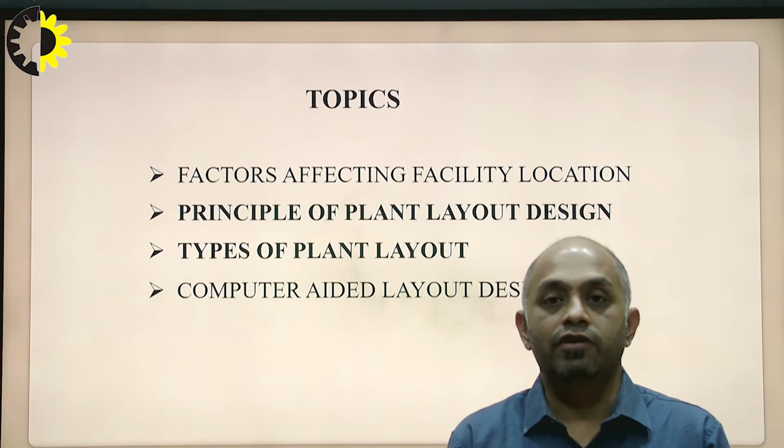So the principles of plant layout design: the facility layout problem is a multi-criteria problem. Numerous factors such as location of work centers, offices, computer center, design and drawing sections, tool room, storage space, utilities, etc., are to be considered.

The principles of good facility layout involve four things that we must take care of when we talk about a plant layout design. It is definitely a multi-criteria problem where we have to see to it that the other aspects and the machine locations, the way we place the machines, the way we produce the products are looked into, for a smooth production system. This relates to the production system that we have read in the previous lectures. These are 4 principles that we will talk about in detail in the coming slides.

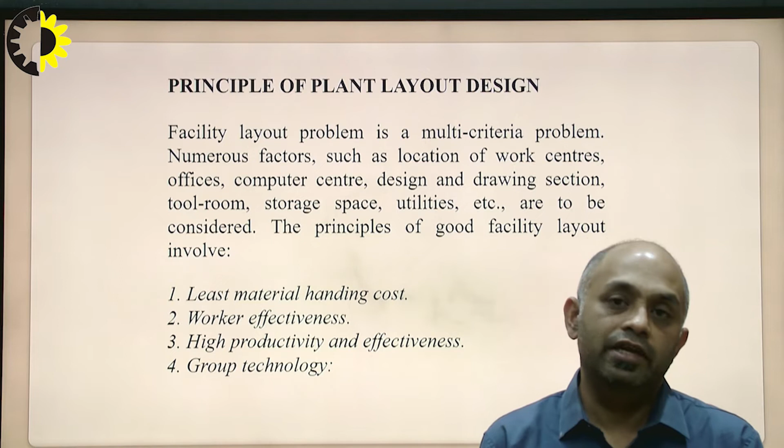The first one is least material handling cost. Second one is worker effectiveness. Third one is high productivity and effectiveness. And fourth one is group technology. So we'll see how these principles are used whenever I want to design a plant layout. These are basic principles that we have to take care of, and we implement them in the design process.

So the first is the principle of least material handling. For less material handling, the following approaches are adopted. Place facilities as per the sequence of part operation. Then proper location of store and packaging area. Then smooth and continuous flow of material. Then utilization of vertical space, height in material transport. So these are the points that we have to see whenever I design a material handling system.

In the process, I have to make sure that the layout is designed in such a way that the material handling is as less as possible. Material handling involves lots of time and also cost. So if the material handling is lesser, then the time is saved and the money is also saved. So place the facilities as per the sequence of the part operation.

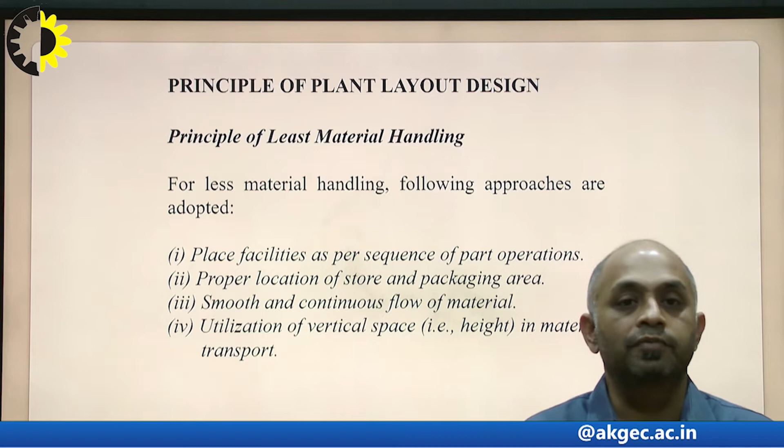Proper location of store and packaging area, smooth and continuous flow of the materials is very important, and then utilization of vertical space and transport. So this is something that we have to see when I talk about any plant layout design, right?

The second thing that comes is the principle of worker effectiveness. Effectiveness is nothing but the performance factor that works out here, how effectively we are doing this job. We have read about effectiveness in the previous video lectures, so now we can relate that effectiveness here in the plant layout design. For better worker effectiveness, the following approaches are adopted.

If I really see the concept that we actually talk about here, just wait, I'll just open the pen and we'll see how things actually work out here. The integration of similar facilities at the same location, right?

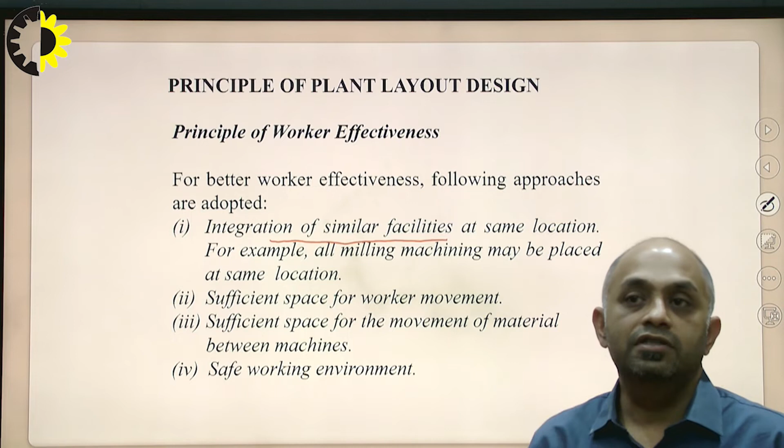So if I really see, worker effectiveness can only come up with the few changes that are required. I know that effectiveness can be imbibed with motivation also, but from the system parameters, I see integration of similar facilities at the same location, like all milling machines may be placed at the same location. So the operators of milling machines are staying together, and their work will give a better output when you place them together.

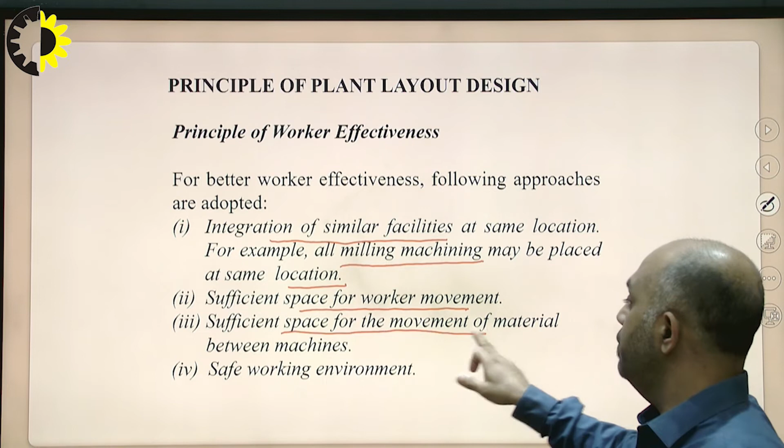Sufficient space for workers for movement, sufficient space for the movement of material between machines, and a safe working environment. These are the basic points when I talk about worker effectiveness. Workers are to be effectively used in the system so that their performance is high.

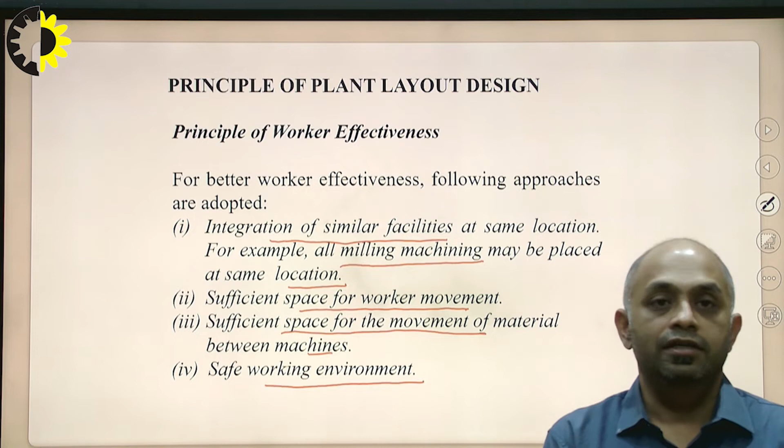One thing very important in plant layout is that there is a fear of obsolescence. If we do a layout in such a way that tomorrow, if the product changes, we cannot make changes in the layout. So we have to see to it that flexibility to expand is very important, flexibility of rerouting is important, and flexibility of varied product mix is also very important.

If tomorrow the product variety changes, we can easily accommodate that into our plant layout. If the routing is not rightly happening, we have to see that it can be rerouted if required. And there must be flexibility to expand the plant if required. All the options are to be kept in mind when designing a plant layout.

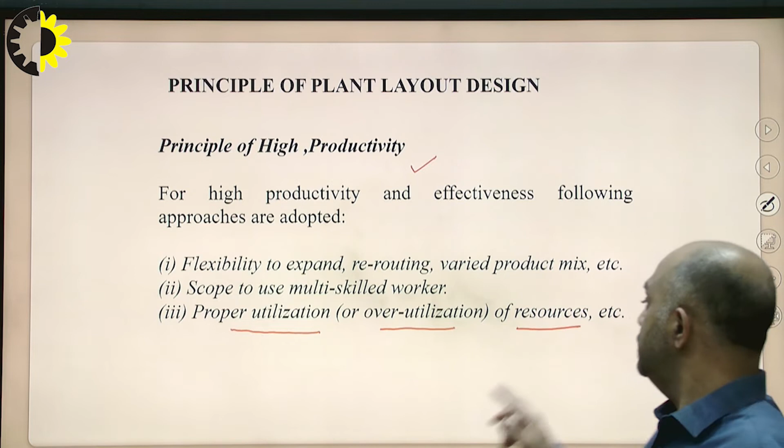Now, the second point in the principle of high productivity is scope to use multi-skilled workers. And the last one is the proper utilization or over-utilization of the resources, etc. So we can use the facilities and resources that we have rightly, so that productivity is achieved.

This is the last principle of plant layout design, the principle of group technology. For deriving group technology benefits, the following approaches are adopted. First, group similar parts in one family. For each part family, design a machine cell. A machine cell is a combination of machines which caters to all the processing requirements of the corresponding part family as far as possible, and minimize the inter-cell transfer of parts.

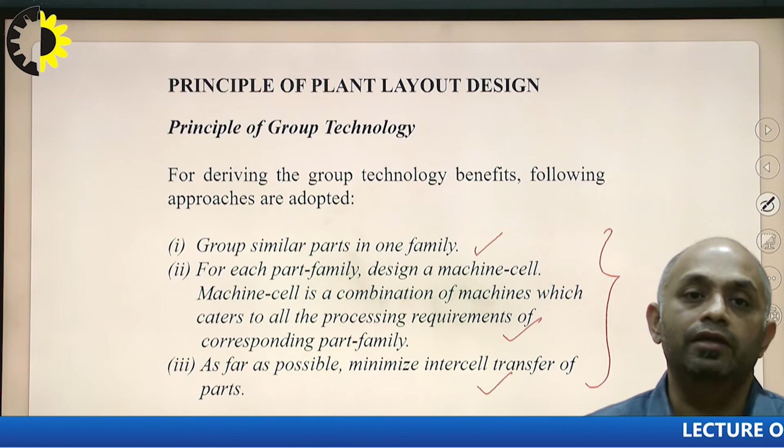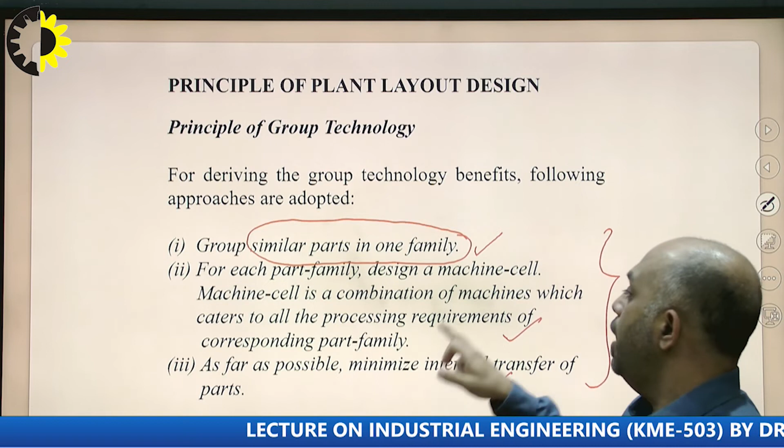So this concept talks about grouping the machines rightly, so that there is minimum time between movements and material transfer movement is as minimum as possible. This is basically grouping similar parts in one family. In group technology, we divide or separate the parts from one another depending on the part family.

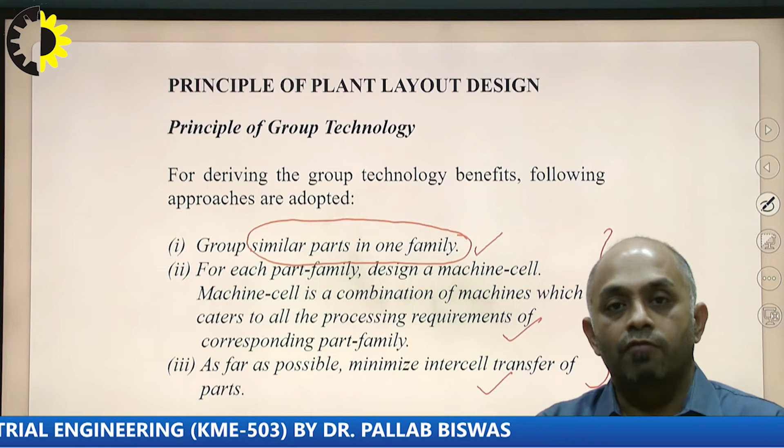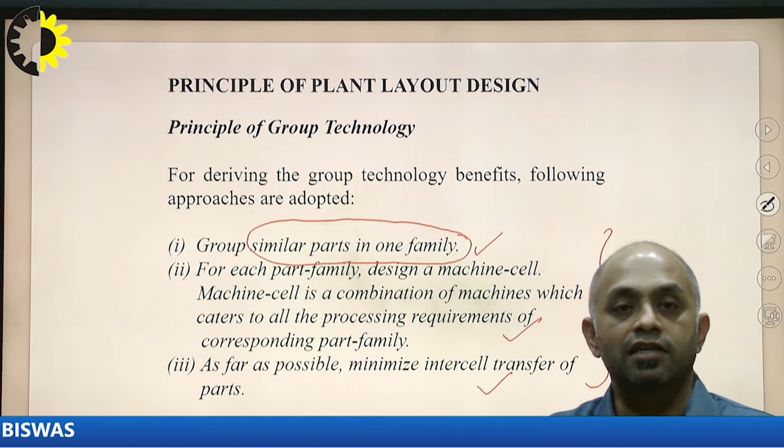If I talk about a cylindrical part, the operations done on that part are mostly on the lathe machine. So we can make a family of parts having a cylindrical shape, where a turning operation is required and the job rotates. This is a family you can make, and we have different codes for that.

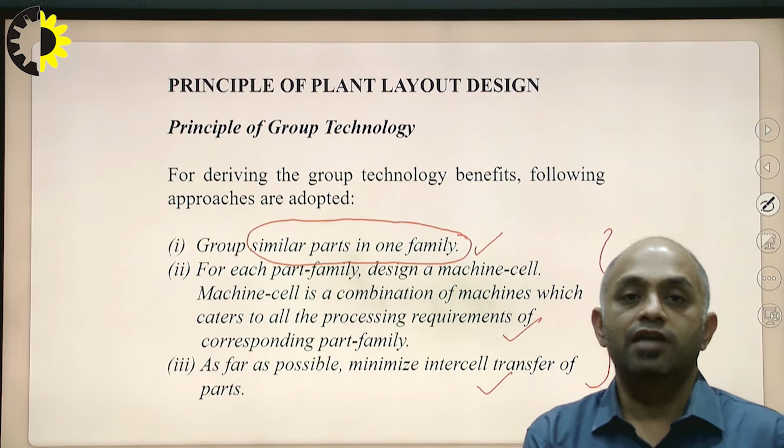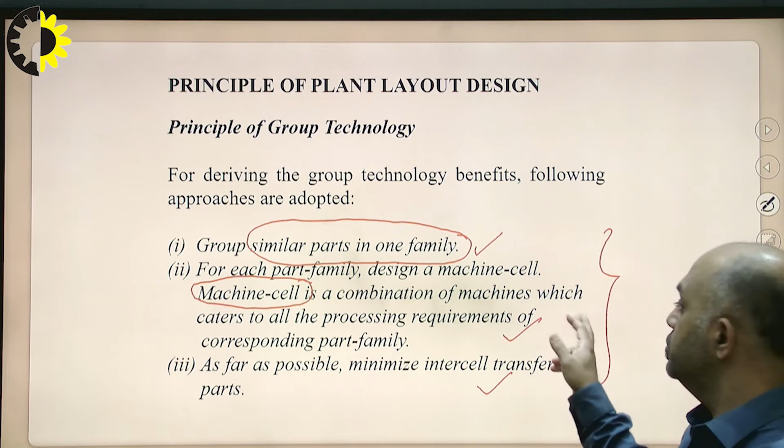Group technology helps us understand that the types of machines are to be kept in the same place, and that is why we make a machine cell, where we place a product and manufacture it from that machine cell. It's a combination of machines which caters to all the processing requirements of the corresponding part family.

As far as possible, minimize the inter-cell transfer. We must minimize this rightly so that the time in between transfers is not wasted. When you talk about group technology, there is a concept of line balancing. We'll talk about this in the coming videos.

When I talk about line balancing, I basically talk about making a number of operations into a cell, and then these cells are planned with the precedence diagram, and a whole lot of concepts come in when I talk about line balancing. And then I make sure there is no balance delay.

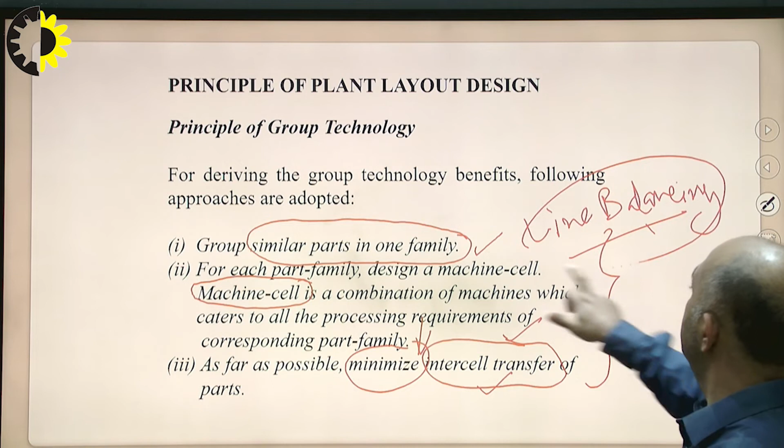The efficiency is higher, the smoothness is higher. So, these are the concepts that we will talk about in line balancing whenever we come to this lecture. In the coming videos, we will see how we can plan a line balancing problem. So, like this we can use this group technology concept.

Now, we come to layouts, the types of layouts. So, today we will be talking about product or line layout, and there are actually 4 types of layouts that we will be discussing in this lecture series. So, first today we will only talk about the first one, which is product or line layout.

So, we have got commonly 4 types of plant layouts, and these are all connected with the production systems. When I talked about production systems, you must remember that we talked about different types of production systems, and those production systems are basically accommodated in the plant layout. So, the type of production system is required, and then the plant layout is defined according to that.

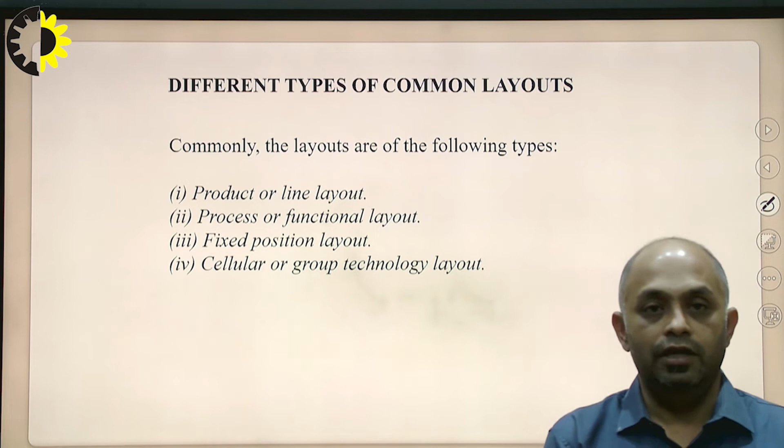So, we have got 4 types of plant layouts. These are product or line layout, the second is process or functional layout, the third one is fixed position layout, and the fourth one is cellular or group technology layout. So, this group technology plays a very important role. So, I advise you to also go through some literature on group technology, so that we can see that very rightly. So, product or line layout.

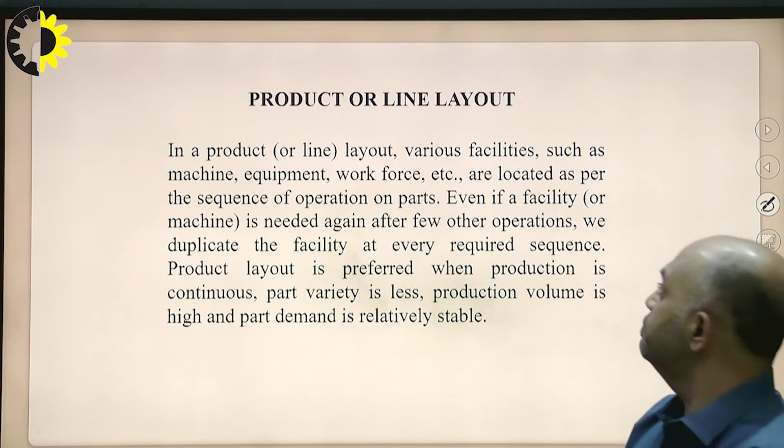In a product or line layout, various facilities such as machines, equipment, workforce, etc. are located as per the sequence of the operation of the parts. Even if a facility or a machine is needed again after a few other operations, we duplicate the facility at every required sequence.

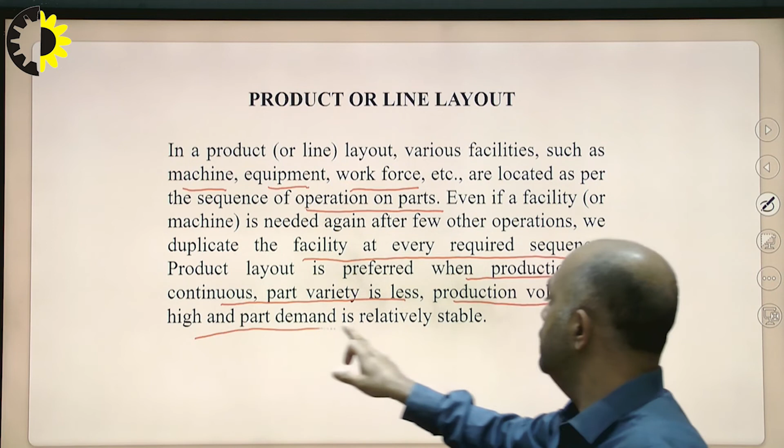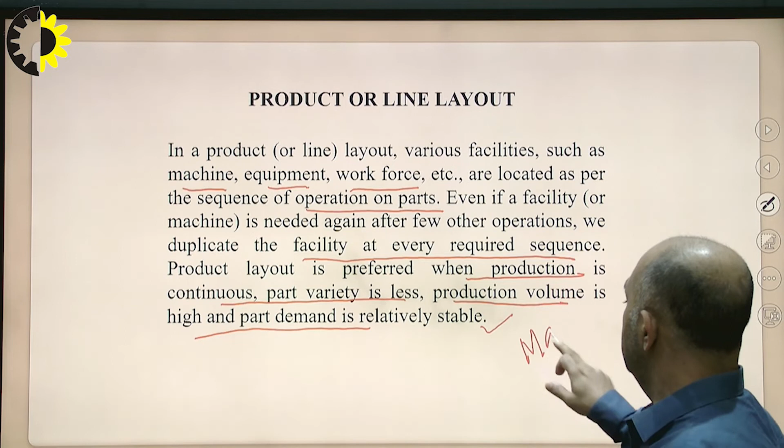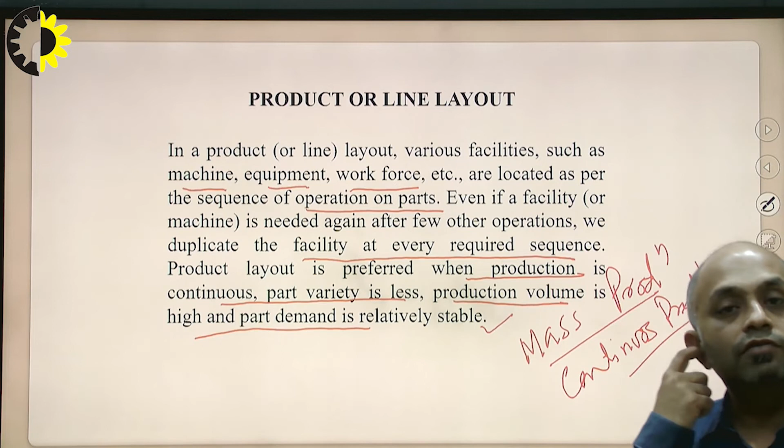Product layout is preferred when production is continuous, part variety is less, production volume is high, and part demand is relatively stable. Now, if I really see, this is a requirement that basically talks about mass production, or say continuous production also, but more of mass production. So, we have got two things here: one is we are catering to mass production, or we are also catering to continuous production.

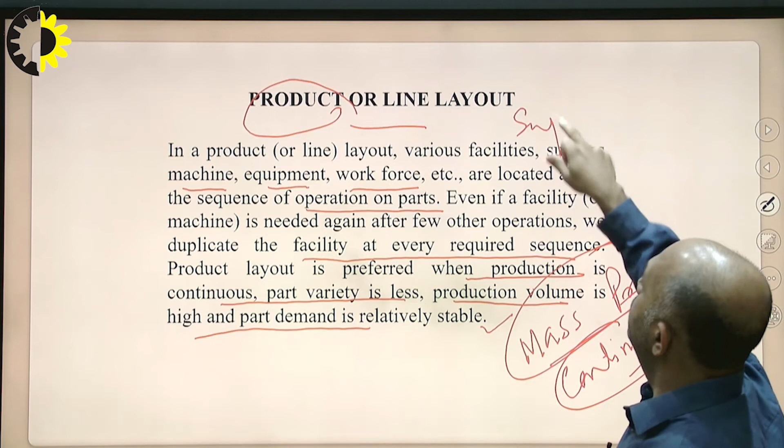So, here the general concept is, the product is the leader, the product defines everything. In this case, if I talk about product layout, I must say that the product is supreme. Now, if the product is supreme, the product defines how I will place my machines and how the system will work out.

They also say that if the product needs the same operation after say 5 operations are over, we have to place a machine after those 5 operations; the same machine can be put again. So, the product movement should not get disturbed in the case of product layout.

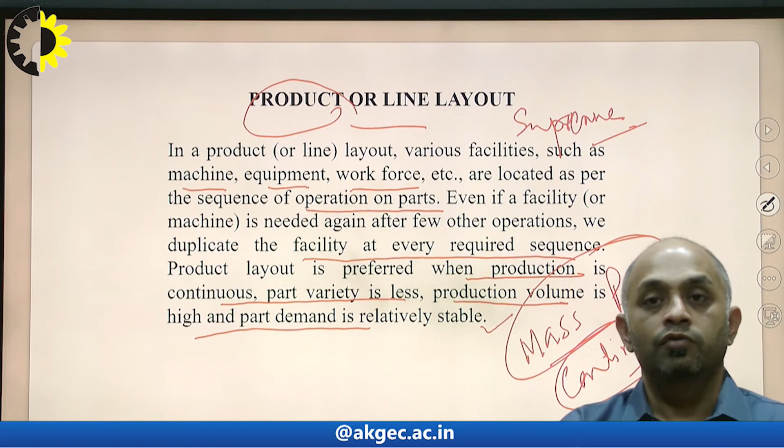When I talk about product layout, I talk about the product which is supreme and defines the rules, and this is implemented when it is mass production, where I know that the product is going to be in the market, and I plan my layout in such a way that the product can be manufactured with lots of ease. There is no time wastage, there is no material wastage, and things get into the right process.

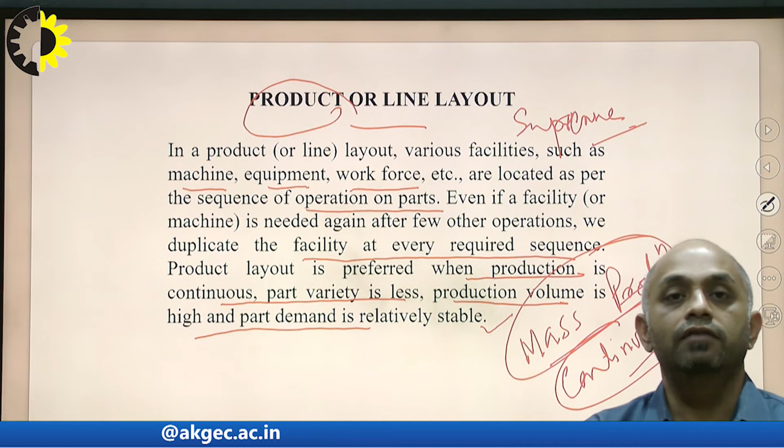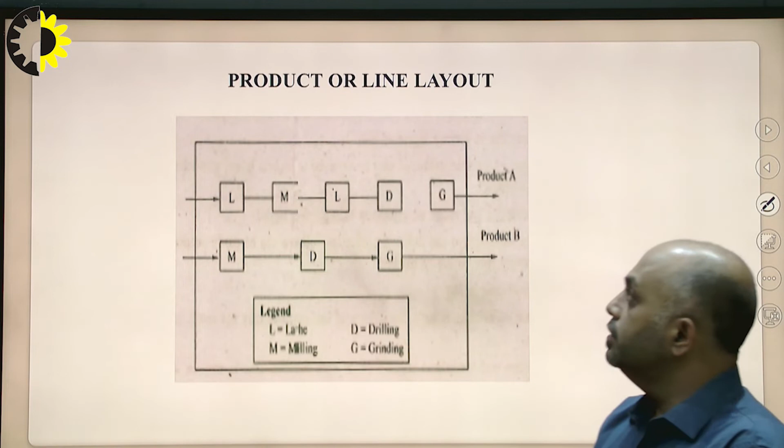So, we will see how a product layout looks, what are the various reasons we do this product layout, and how to do it. So, a product layout basically looks like this, where I have got 2 products. This is product B, this is product A.

If I have got this product A, L is lathe, D is drilling, M is milling, and G is grinding. So the product must have some operations on the lathe machine, and then the product will go to the milling machine, and again it will go to the lathe, and then drilling, and then grinding.

So if I really see, like a product basically needs something on the lathe machine, and then it goes to milling machine for some operation, then again it has to go for lathe machine. So depending on this product, the product should move from this direction to this direction, right? Now if the product needs milling, it should not come back to lathe again.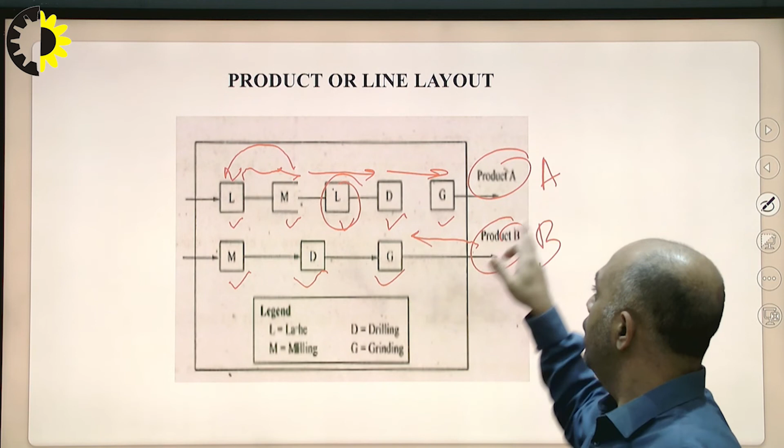After milling, if it needs lathe operation, it should not come back, it should move forward, and then we have to place another lathe here. So depending on the product, the product A defines this layout, right? Now product B defines this layout, say milling, drilling, and grinding. So we have to see to it that the products are supreme and they basically define the layouts.

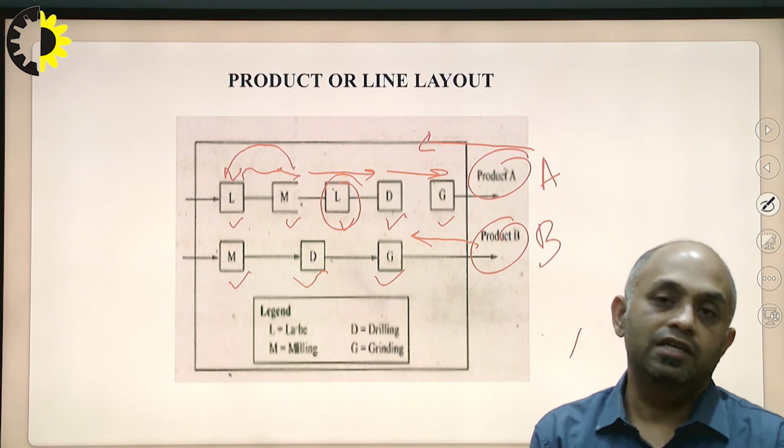So it's very easy, but it is a layout that is always in problem. If suppose tomorrow the variety of the product changes and the product line changes, then the total layout goes haywire, right? We have to change the layout, and that is a very costly process. Advantages of product layout: there is less work in process, WIP inventory, as the flow of the material is continuous along a line compared to process layout.

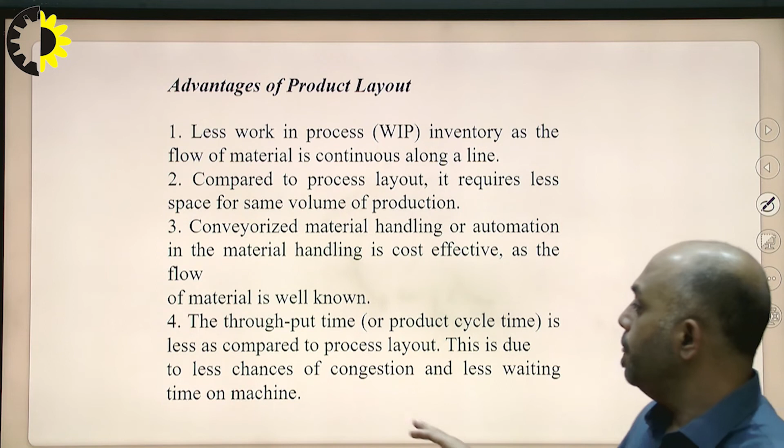We have not talked about process layout yet, but in comparison to the next layout that we'll talk about, it requires less space for same volume of production. Conveyorized material handling or automation in the material handling is cost effective as the flow of the material is well known. The throughput time of the product cycle is less compared to process layout. This is due to less chances of congestion and less waiting time of the machine.

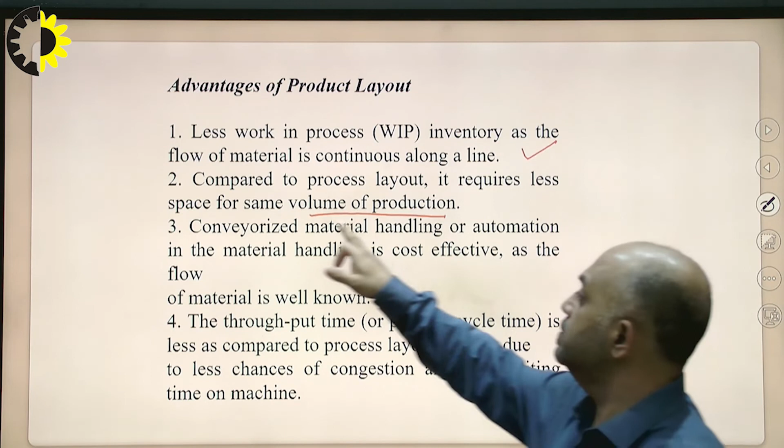So we have to understand, first, the WIP is less because all the machines are in line and there is no time loss in between. Compared to the process layout, it also requires less space because we are not keeping it in a group of machines. We are just keeping it as the product requires. So the same volume requires less space.

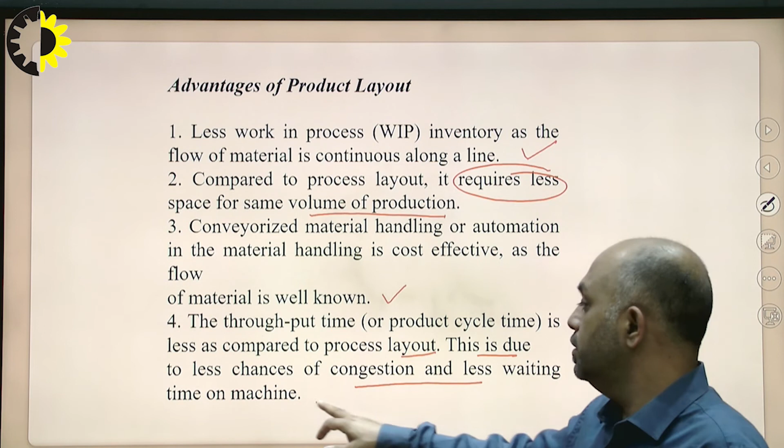Conveyorized material handling or automation in the material handling is cost effective as the flow of the material is well known. So I know the material flow, and it is easy for me to make sure that the flow is rightly done. And then the throughput time is less compared to the process layout, due to less chances of congestion and less waiting time in the machine. So here in this case, there is no delay.

Because the processes are rightly done, the product does not wait for the machines actually. The machine is ready before the previous product operation is over. So the congestion time is less, the movement of the material is easy, and it becomes a very helpful type of layout when I talk about mass production.

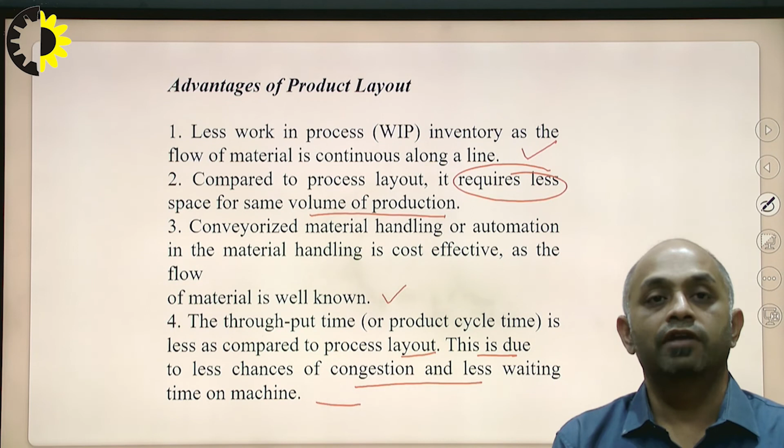So fifth point is simple production planning and control, and better coordination of different activities may be achieved. The skill level of the workers may be less, as a particular worker has to do a particular operation which seldom changes due to standardized production line. The flow of material is smooth and continuous. So we have to always see one thing in this type of layout.

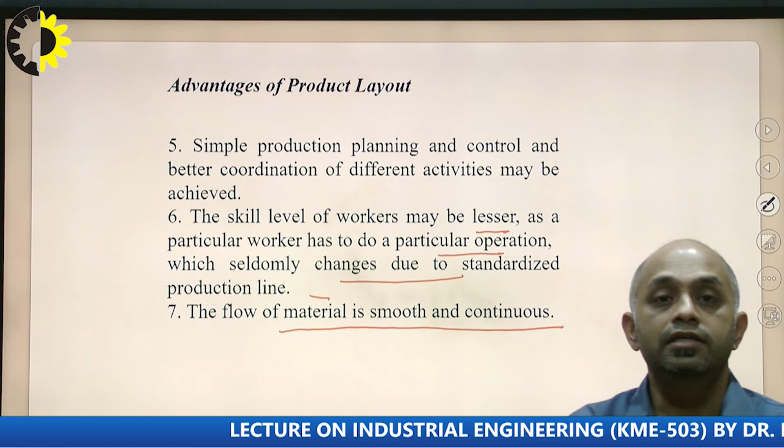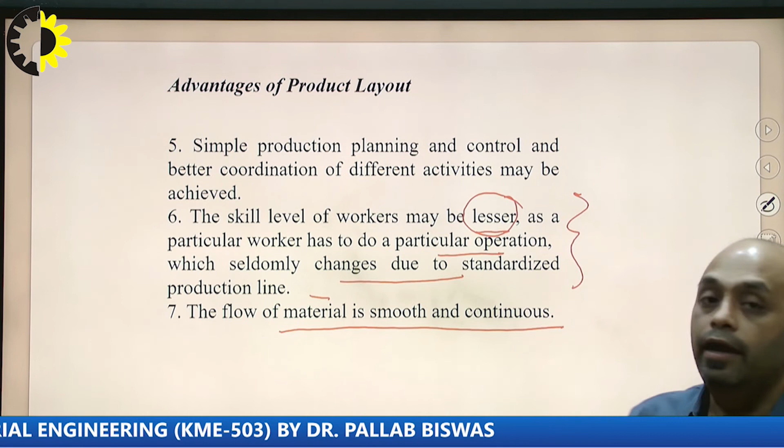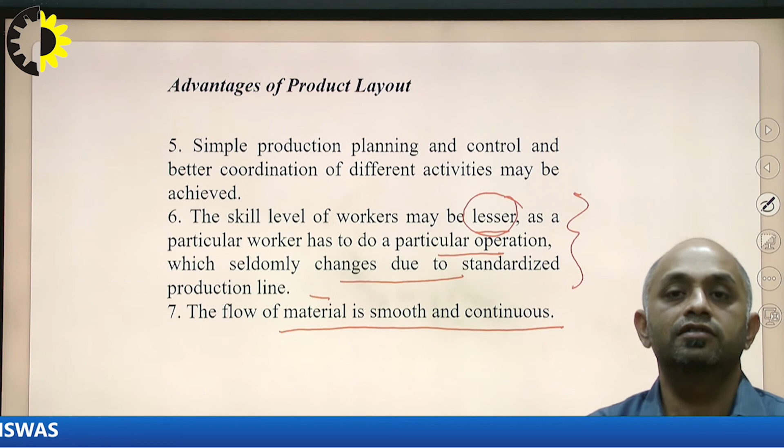When I talk about product layout, the skill of the workers, we already talked about it with mass production. In the product layout, the skill of workers is lesser, because he has to do a particular operation which essentially is a standard operation. So very skilled labor is not required because he has to do the same job every day, right? So he can gain these skills while working. So very highly skilled people are not required in this case.

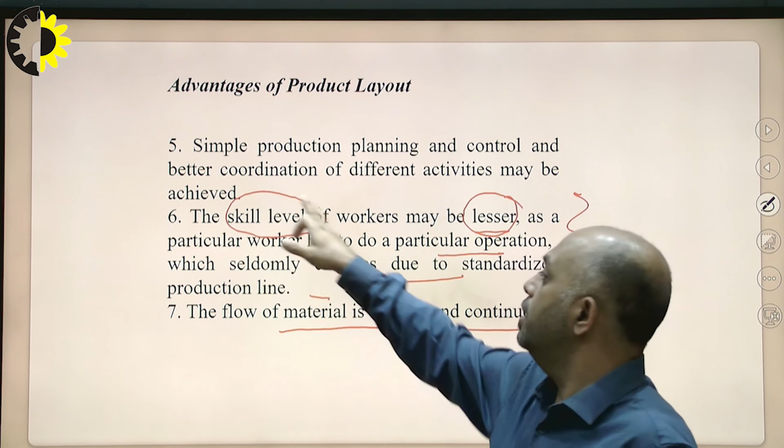So that is what is told here: if the layout is a product layout, the workers' skill level is not very highly required. So you can see that this works with simple production planning and control, and better coordination of different activities may be achieved. The flow of material is smooth and continuous. So this is something that is also very good.

So it's an easy way of producing a product because I know the product. I don't have any risk of changing the products, right? So when I know that the product is going to run in the market, I will make a layout that is basically a product layout.

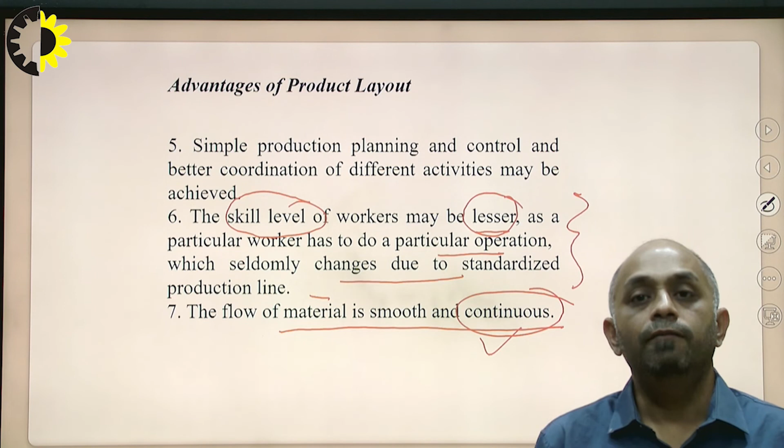Right? Now, limitations of product layout: change in product design is difficult to accommodate. This is very important, that we cannot change the product design because my product is the same, the operations are defined, the process plan is defined. So when the process plan is defined, I know which are the machines that this product will go through, and when this is clear, then I can understand that this product is moving from this machine to this machine.

The operations are already defined. So no product changes are allowed, and it is difficult to accommodate if I really want to change the operations in between, because the machines are all fixed there, and establishing or fixing a machine takes time. Product variety is very much limited. We don't talk about variety when I talk about product layout.

When I talk about mass production, breakdown of a particular machine is a very important fact. A breakdown of a particular machine in the line halts the production output. So one machine gone, the production stops. So we have to make sure that the maintenance of the machines is rightly done. We must check that the machines are rightly maintained and they are in working condition at all times, right?

And then the capital investment in machines may be higher as compared to process layout, and duplication of the machines in the line may be needed. So this is very clear. We have already seen that the capital investment is required because we have to take a number of machines, the same variety of machines, for the production, right? Because it's mass production, we cannot take any risk here, right?

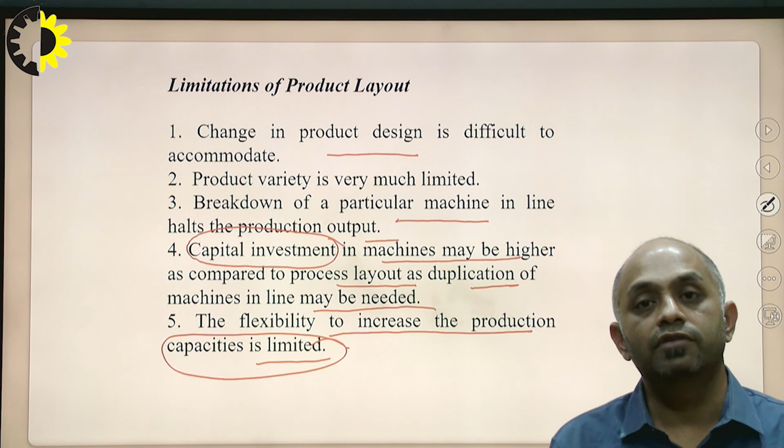We cannot increase the capacities because we are taking 100% output of the system, and we know that this much you can produce. So if I really wanted to produce more, because I have got more demand in the market, I have to set up a different setup, a different layout also, right?

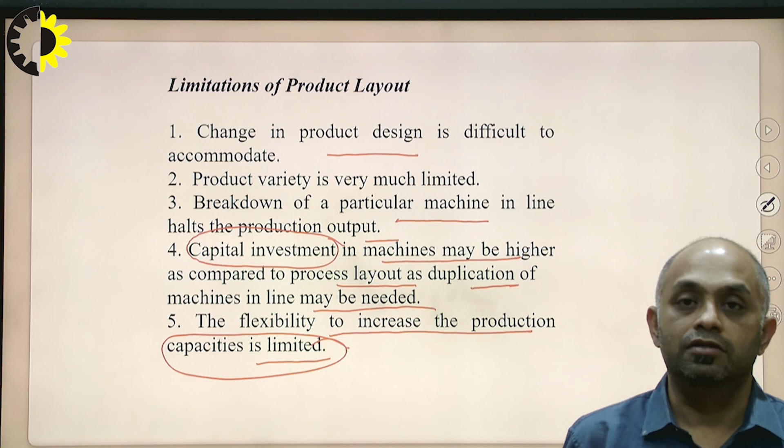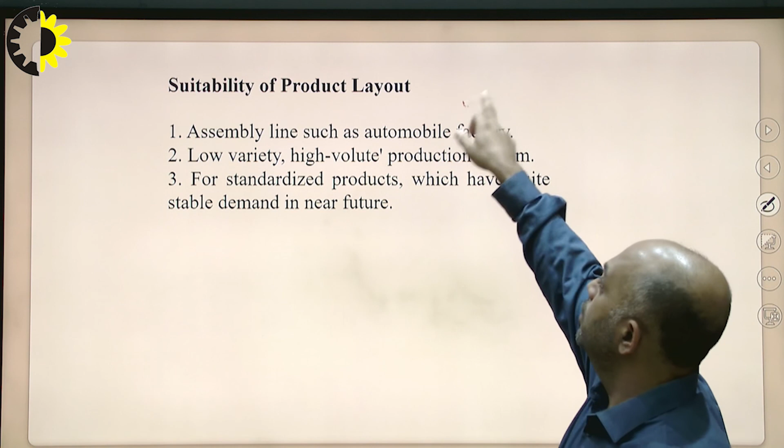So suitability of product layout is assembly lines such as an automobile factory. This is very important, where we are using this product layout. We use product layouts in assembly lines such as the automobile industry, low variety, high volume production systems, for standardized products which have quite stable demand in the near future. So there are three aspects that you can see here. First, assembly lines such as automobile.

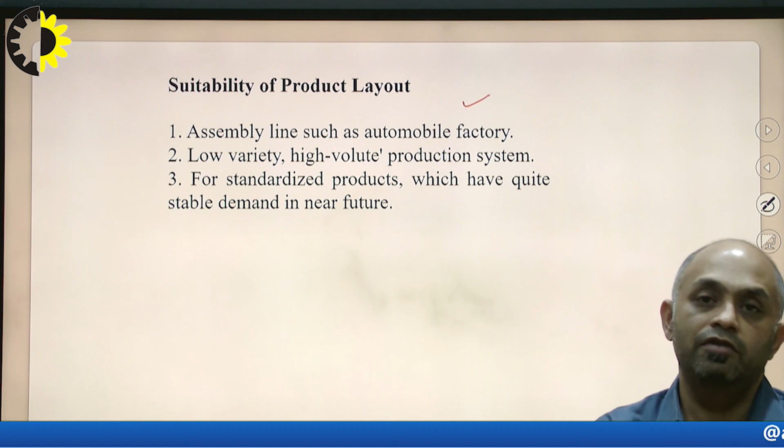So all the automobile products or the cars that we are seeing here are all output from a product layout. It is actually mass production. It's a low variety, high volume production system. So variety is less, volume is very high. It's basically mass production. For standardized products which have quite stable demand in the near future, we know the demand is stable, so we can always fix it up and we can easily produce the output here.

So I think this is something very, very important, and this is the first type of layout that we have talked about in this video. And I would request you all to read the book that I have already told you about. It is Industrial Management by Dr. Ravi Shankar, and this text and all the inputs are taken from that book, with other inputs from other books also. So I think I've clearly told you about product layouts, and we'll talk about the next layout, that is process layout, in our next video.